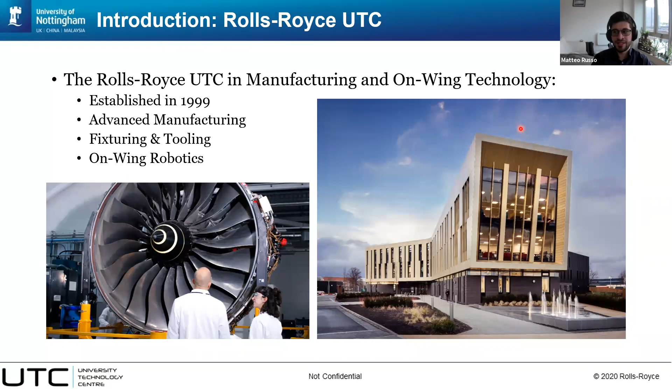It is a bit older than 20 years. It's now 22 years old. And we mainly work on advanced manufacturing, fixturing and tooling, and on-wing robotics. And I will explain exactly what that is in a while.

The motivation behind this research center is the need for constant maintenance and repair on aircraft. I don't know if you know this, but Rolls-Royce produces a good percentage of all the engines of airplanes. It's between 30 and 40%. And so it works with Airbus and Boeing mainly.

And they don't sell engines, they lend them. Airbus and Boeing borrow the engines from Rolls-Royce, and Rolls-Royce still has to take care of everything in the engine. So it has to take care of any kind of maintenance, regular inspections, and repair if there is damage. So the main issue that we have with this is that if anything happens to an engine, we don't know it until we can actually see it.

Here on the slide, you can see what's inside an aero engine. There is this huge turbine with a lot of extremely small blades in extremely cluttered, small environments and passages. So how do we see it? Usually we disassemble the engine from the wing. We have to take it into a laboratory, open it up, and then we can properly inspect, check if there is damage, and repair the damage.

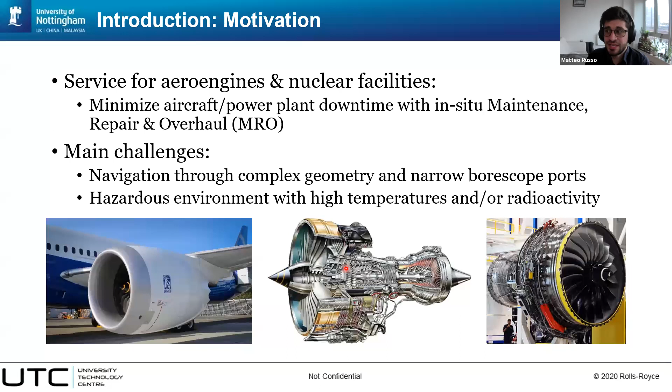So what we propose in our laboratory is to use snake-like robots. You can imagine these snakes that are extremely thin. I don't know if you can see my video. I have the body of one right now. They are extremely thin, extremely flexible, and they can be extremely long, even some meters long. And we can insert these snake robots in the engines without having to disassemble the engine or open it. And once they're in, they can explore, find damage, and repair it.

So the first robot that I want to show to you today is the shortest of our snake-like robots, which is a bore blending robot. The issue that we try to address with a bore blending robot is the fact that sometimes when you have the aero engine turbine moving, there are some debris or small items that get sucked in the engine, hit a turbine blade, and damage it.

When this happens, you usually have a chip, a very small damage that can create the beginning of a failure or crack. So in order to remove this failure, we have to take a grinding tool or a milling tool, and drill around this failure to make the surface smooth. The tool that we use, you can see it here, is the tip of this robot. And it's basically what dentists use to grind your tooth when you have a tooth operation.

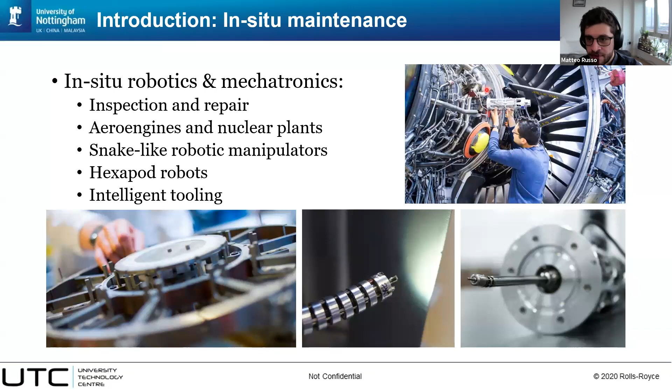The aim of this robot is to have a robot that can be assembled onto the side of an aero engine. You can see it assembled on the side of an aero engine here, actually. So you attach it to the side of an engine, and the robot goes in. There is a very small camera on its tip. We find the damaged blade, and then we start drilling and removing some material from it.

The main advantage of this robot is that it's teleoperated. This kind of operation requires an extremely skilled operator manually operating the grinding tool at the moment. And Rolls-Royce in particular has a very small number of operators, and they are all very close to here in Derby, 10, 20 minutes from here. And they could be called to operate on damaged aero engines everywhere in the world. So if you have a damage in London, in Paris, that's easy.

The operator just takes a train, maybe 2 hours, 3 hours, and it's there. But imagine having a plane stuck in Mexico City or in Australia. In that case, at the moment, you have to physically take the operator, put him on a plane, and ship him to another continent. And that can take days in which the airplane cannot move. And also you need to send a person for days away for a repair that can be

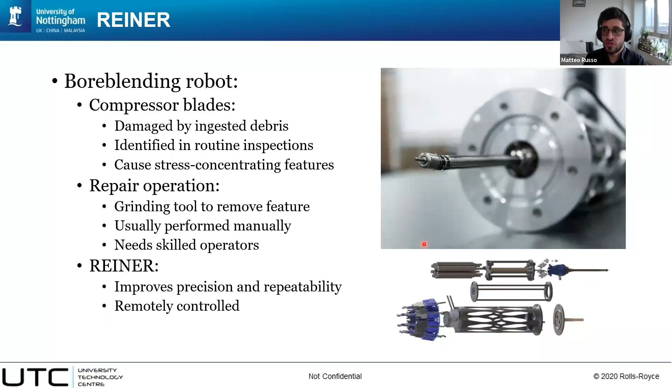done in hours. So our idea is to have this robot being teleoperated from here, from the Rolls-Royce headquarters in the UK, everywhere in the world. So you can just ship the robot or have the robot in main hubs and airports in all the continents, so that if a damage is found, anyone can just take the robot, attach it on, and then you have the skilled operator moving the robot from here.

And here you can see some additional details of the robot. There is this large cylindrical body that is assembled outside of the engine. And its main role is that of guiding the smaller snake robot inside the engine. So it pushes the snake robot in and it rotates around its axis.

And then you have the tip, which you can see here in detail, which has a stereo camera. It's driven by cables. So we have cables going through the body of the robot. And just by pulling cables, we can change the shape, control the shape of the tip. And there is the grinding tool at the end.

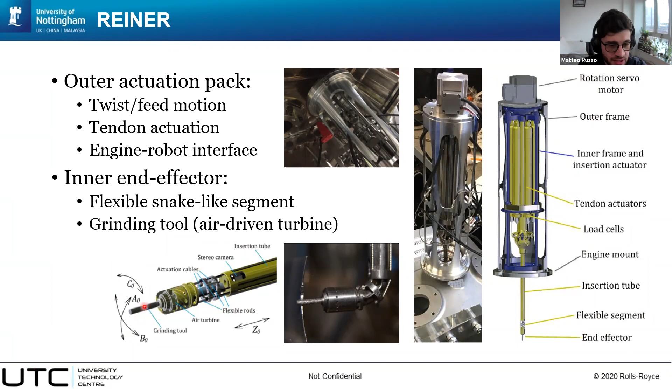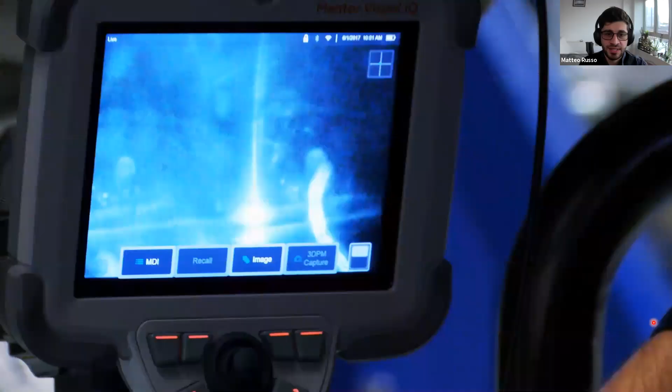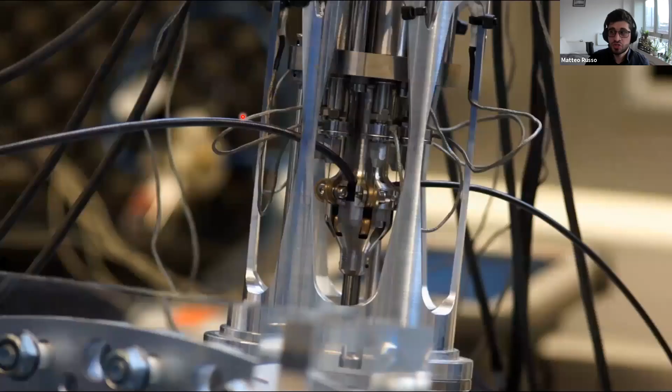And in this video, you can actually see the robot moving, working. So here you can see an operator attaching the robot, assembling the robot on the side. And this is what we actually see from the camera in the robot. And this guy here is our skilled operator from the UK that is still operating the robot from his own computer, which can be on the other side of the world.

And here you can see the outside part that is pushing the robot in. You can see the tip of the robot entering. This is a camera inside the engine. And we start bending the tip until we find the damage that you can see here.

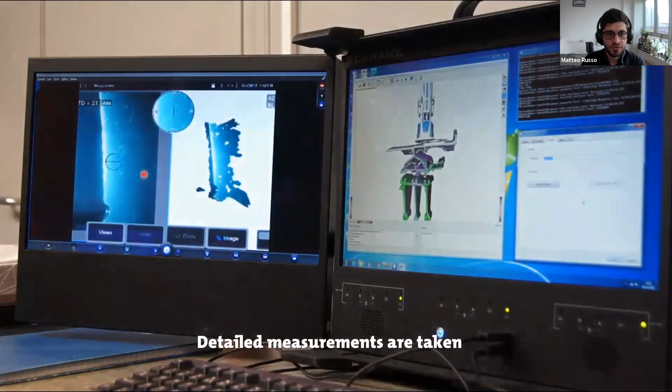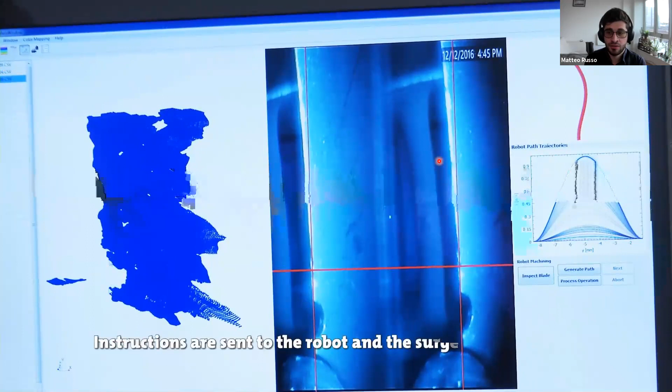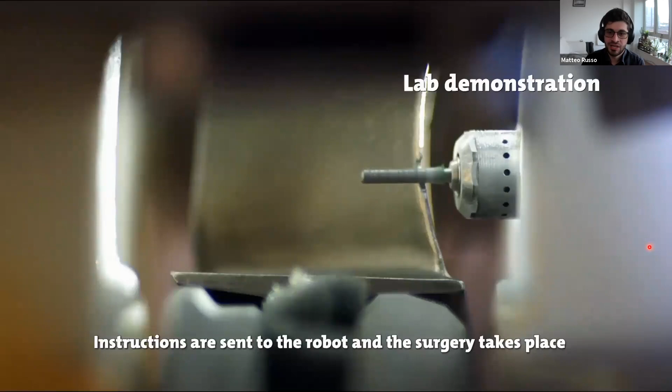Then once the operator has found the damage, we can use the camera on board, which is a 3D camera, to reconstruct a 3D surface, and the operator can plan for the repair operation on this 3D surface, so it can simulate the motion before trying it. And once that's ready, you can see the robot just going in and slowly removing some material until the surface is smooth.

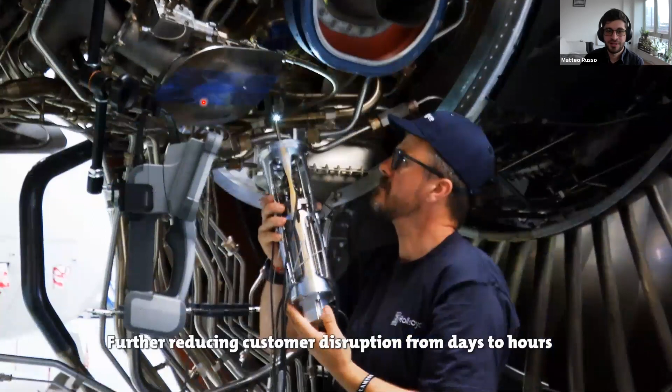Once the operation is done, the tip is just taken out, the robot is disassembled, and the repair is finished. So this is a robot that was developed up to 2017. We are currently working on a second generation of it, which should be ready by next year, hopefully. And it has been already tested on real engines.

But I was speaking of snake-like robots, and you can see that this robot is extremely short. Let me move on to a robot that might remind you more of a snake, so with a longer body. I'll show you first of all a simulation of a concept of a longer snake robot that is used for in situ coating repair.

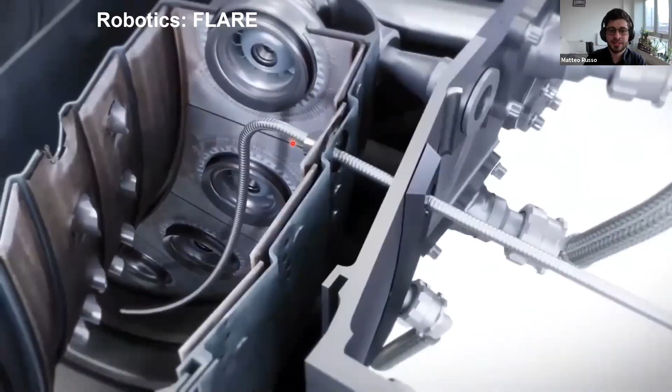So this robot doesn't work on blades, but works in the combustion chamber of the engine instead, which is a larger area, but being larger, it requires a very long robot, more than 1 meter in, to find damage, to inspect the entire area.

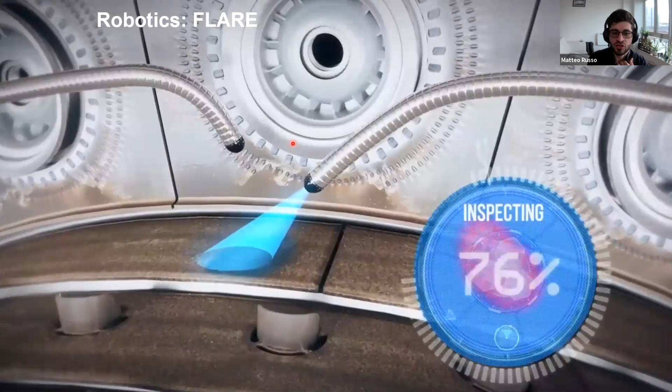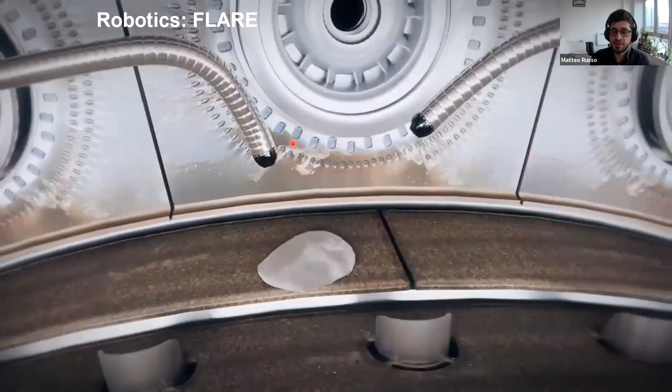And once it finds the damage, which in this case is a surface that needs some coating repair, it inspects it, it prepares it, and the surface is repaired by spraying a flame at several thousands of degrees on top of it for 20 to 40 minutes. Once the coating repair is done, we re-inspect again, check that everything is okay, and then go out.

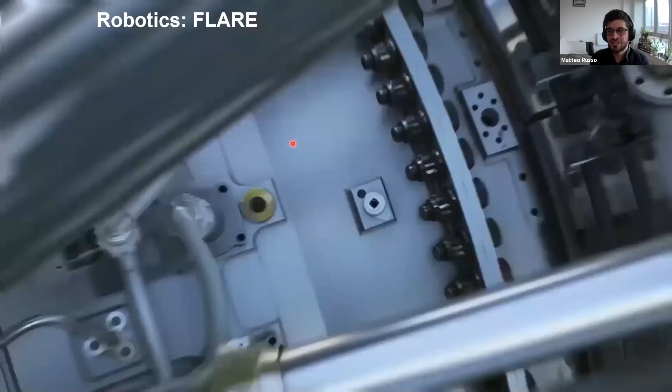So in this case, what are the challenges? The challenges are different from the previous one. In the previous test, our main challenge was the small passage, that we had a very small entrance to the engine. And the other challenge was that we needed teleoperation.

In this application instead, first of all, we need a longer robot. We need a robot that is more than 1 meter long. And also we're working with a flame that is thousands of degrees and basically melts everything; it will melt every kind of sensor that's equipped on that robot.

So our solution, as you saw in the video, is to use 2 robots. One of the 2 robots has all the sensors. It has a camera, it has everything else that is needed for inspection, while our flame robot only carries the flame.

So here in this video, you can see the navigation as it starts. Okay. So here in this video, you can see an actual prototype navigating in. It accesses from, again, a very small part on the side, and then it's slowly inserted in until we find the damaged part.

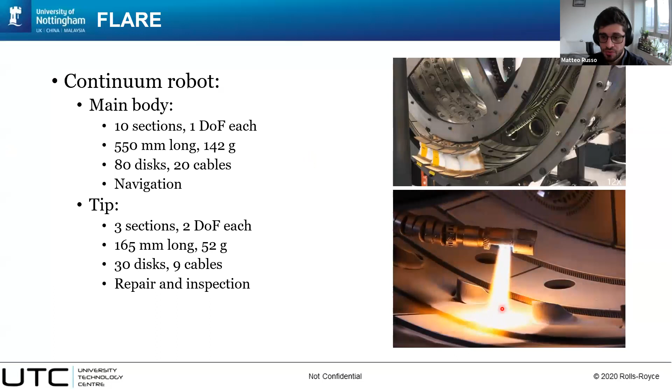This robot has 10 different sections. Each section of the robot is controlled by 2 or 3 cables. And overall, this one is 550 millimeters long. We have 10 degrees of freedom in this robot. The tip of the robot instead has a flame, and here you can see it repairing the coating in an actual operation. This has been tested also on a real Rolls-Royce engine.

And moving on from the aerospace industry, I'm going to present one last robot that works in the nuclear industry. The nuclear industry has different challenges when compared to the aerospace industry, but it's similar in many respects. Usually the spaces are a bit wider, but once we get into glove boxes or the actual nuclear reactor, there are a lot of very cluttered environments or pipes in which we need to navigate, that we need to inspect and check. And as you can imagine, conventional robots just don't behave well in these environments.

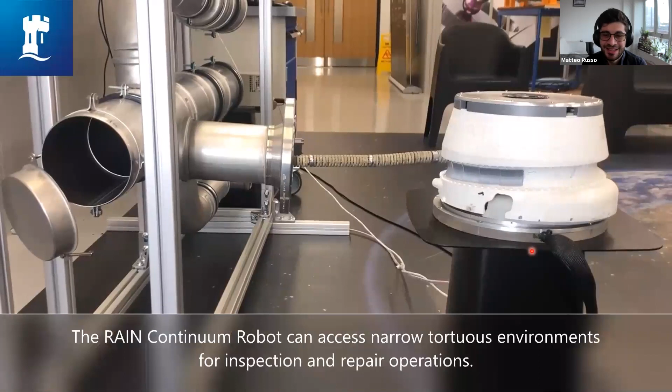Just imagine a pipe section, a lot of pipes with bends, maybe U-shaped. A standard robot, first of all, cannot access if the pipe has a small diameter, and then it just cannot bend several times along its body unless it has an incredibly high number of degrees of freedom, like our robots. So our proposal for the nuclear industry is a slightly thicker robot. The diameter here is 20 millimeters, so 2 or 3 times the diameter of the aerospace one.

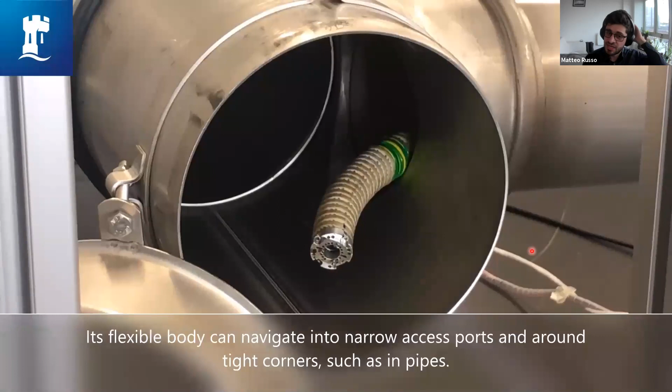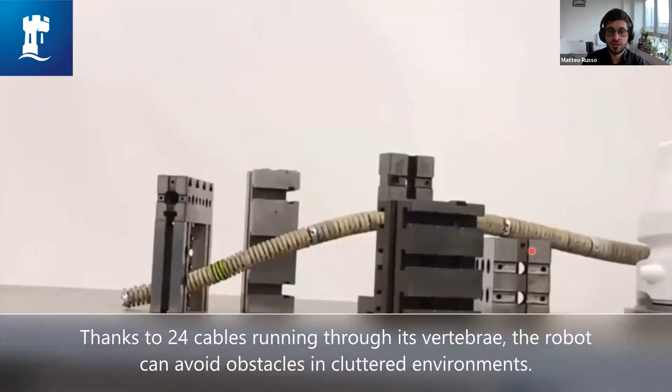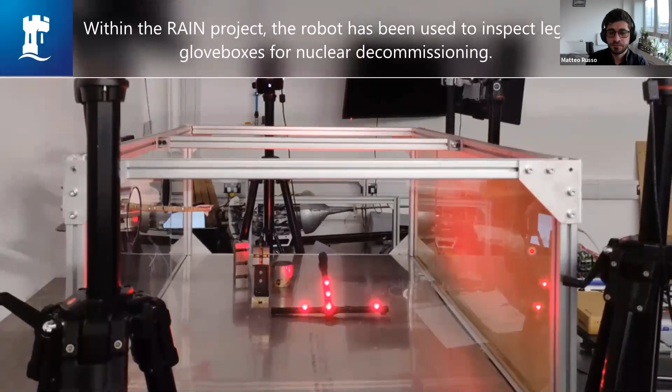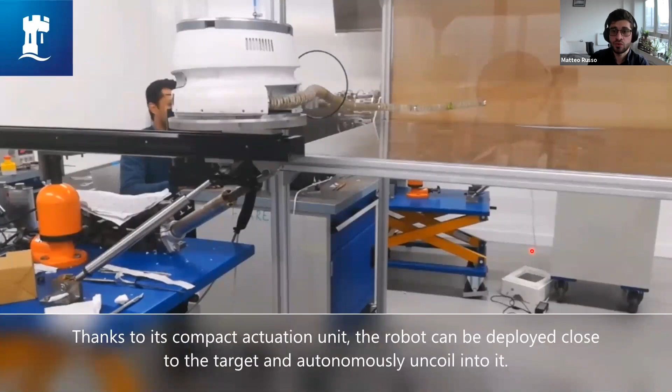And you can see it navigating in pipes, and thanks to its flexible body, it can navigate around corners without any problem. And it has a hollow core. So inside of this robot, there is an empty channel through which we can bring cameras, we can bring tools, or we can control grippers or everything that we need. And you can see it as it navigates through complex environments; its body shape can be changed to access different parts. It can be used to inspect ceilings as well, something that a lot of flexible robots cannot do.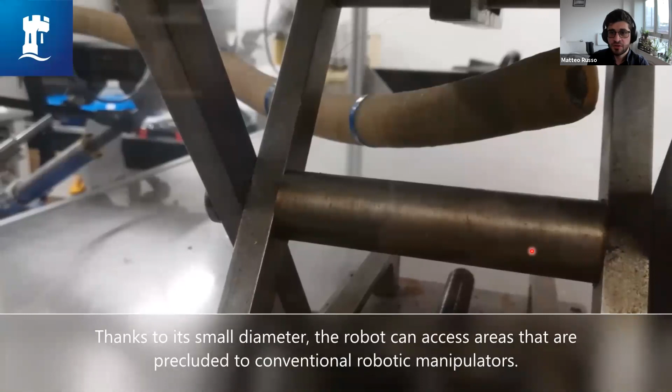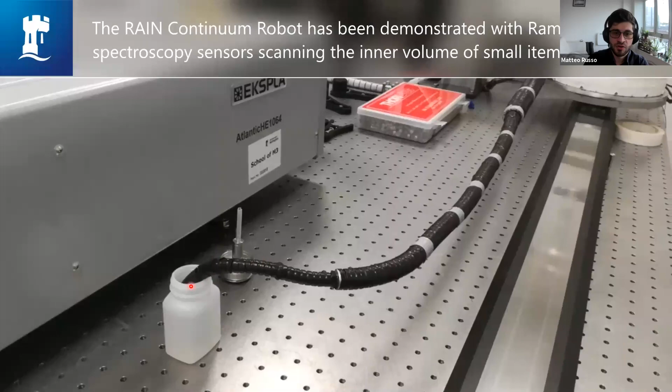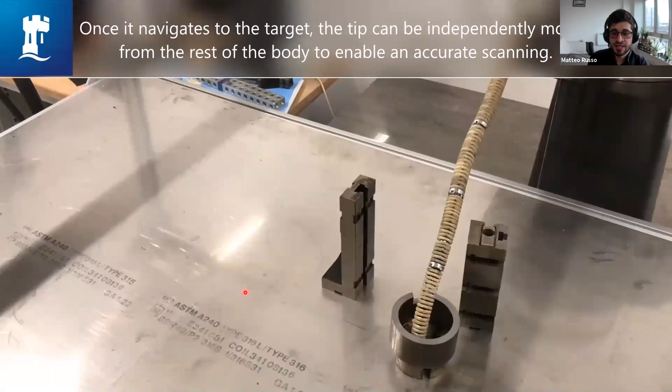And here you can see it inspecting a typical item that can be found in a nuclear environment. Here you see it entering a bottle that's several meters away from the main body, which is something that's impossible for a conventional robot. And here it's exploring, inspecting a small item inside of a glove box mockup.

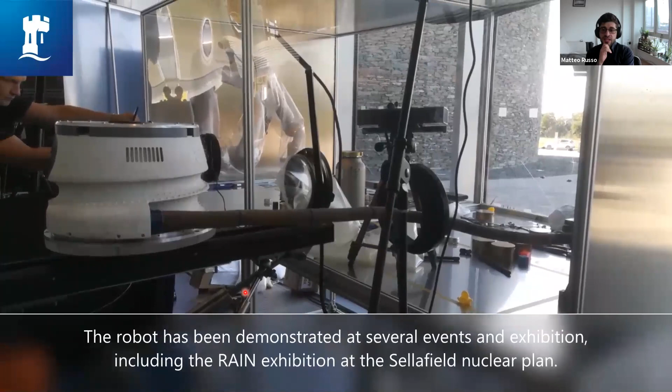So this robot is sort of similar to the ones that you've seen before. It's still cable driven. It's still controlled by a certain number of cables, 24 in this case, going through its body, and just by pulling, pushing or releasing the cables, you are able to change the shape of their sections. You can see it easily. In my video, I'm holding a cable, and you can see that as I pull or release the cable, the shape of the robot changes.

So overall, here I showed you a quick introduction on snake-like robots and how they can be used in different industries. In conclusion, the first thing that I want to say is that these technologies are becoming mature right now. These things that you've seen are mostly at a research stage, and they have been demonstrated in real case scenarios, but they're not being used by industry yet. Rolls-Royce and other industries are planning to adopt these kinds of technologies within 5 to 10 years. So what we're looking at now is research that will have an industrial impact soon, but hasn't had it yet.

Another thing that I want to point out is that I was presenting a single technological solution that can be applied to a variety of problems, but obviously this doesn't mean that no other solution can be found. For example, maybe someone in the next year will develop some kind of swarm robots, mosquito robots or insect robots that can easily crawl into the engines and perform the same repairs. So I was just presenting the technological state of the art on snake-like robots, but I'm not saying that this is the only solution to these kinds of problems.

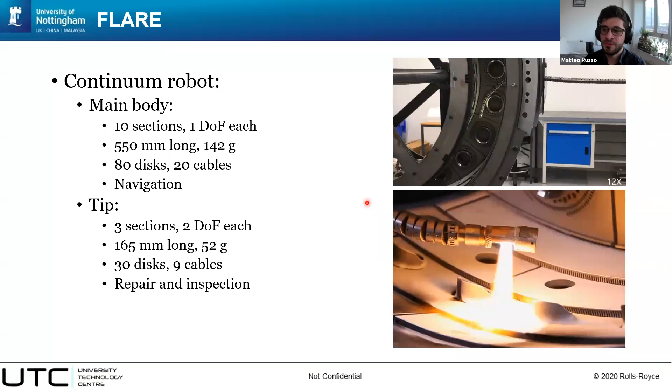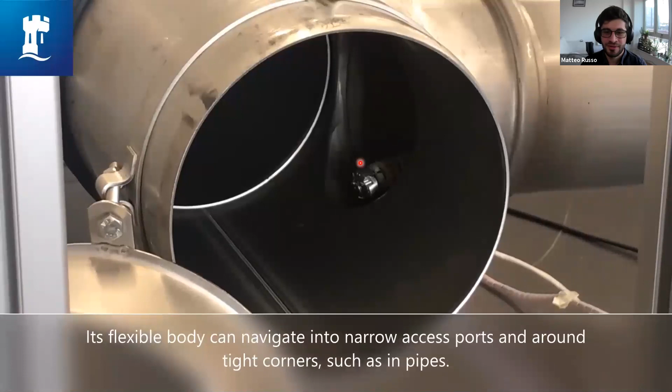They actually are. So if you see this one here, this is titanium and steel. This one in particular is titanium because of temperature. Others of the aerospace ones are just steel discs. And if instead you see this one, this is the nuclear one. This is just made in resin. It can be easily 3D printed because we don't have issues with high temperatures or super high precision that's needed in the aerospace industry.

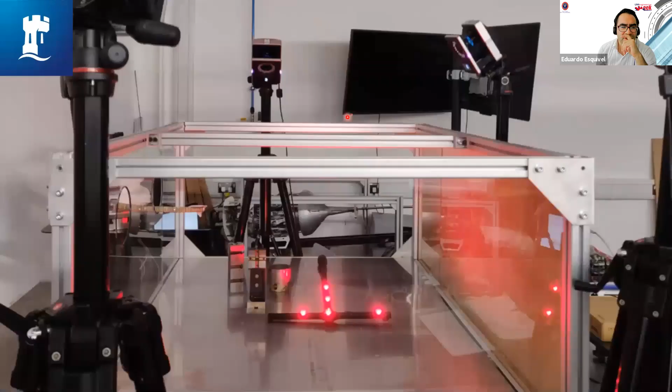It mainly depends not on the application, but on the size. Because if you're working in nuclear, you can keep the sizes bigger. So we can have the thickness of the disc of 0.5 to 1 millimeters. In some of our aerospace applications, we need some of the discs to be 0.2 millimeters thick. And if that's not done in titanium, it just breaks.

Okay. Excellent. Eduardo Gámez Castillo, how was the process of identifying the problem and the design or process of solving that problem? For example, about the snake robots. Okay, so identifying the problem, well, everything started from aerospace, with Rolls-Royce basically asking us to find a solution to automate this inspection and maintenance. The way they did it, and they still do it, is by using borescopes, which are basically empty tubes, like flexible tubes with a camera at the end.

So just imagine having this flexible tube, which is very similar to, think of your charging cable for your phone. It's flexible, there's nothing inside, and imagine having a camera at the tip. So what they do at the moment is they take this borescope, they put it inside the engine, and they just push it through until they manage to get to the place that they want. Obviously, one, this takes time, it takes a lot of trial and error. And second, there are places you cannot get to with a fully flexible tube. So our idea was to add cables inside it to control the shape of this robot automatically from outside.